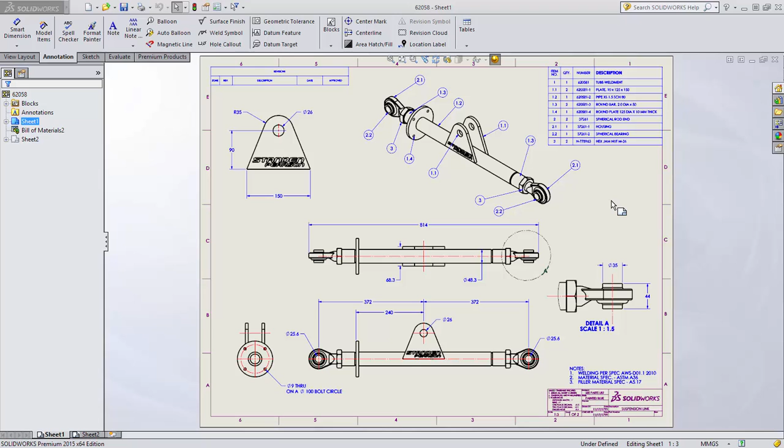Drawings are still important for many SolidWorks customers, and with SolidWorks 2015, we continue to add more functionality to meet their needs. When working with notes and balloons, a new leader type is available, the spline leader, and of course, these are fully editable. These leaders are especially useful for busy drawings or for just pointing to that tough-to-reach part.

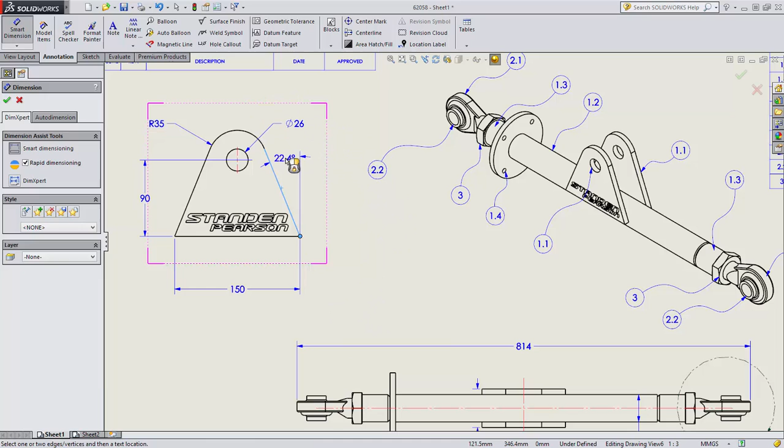When adding an angle dimension, it's no longer necessary to create construction geometry. A manipulator is presented, and you can select one of the legs to aid in the creation of the dimension. And after placement, if you don't like the position of the dimension, there are new options to display the explementary angle or to place the dimension as a vertically opposite angle.

The process of adding revisions has been streamlined. A new button is available directly on the revision table to add a new row. This adds a new row, the revision letter and date, and then takes you directly to place the revision symbol. After placing the symbol, you can see that the revision table now identifies the zone where the symbol is placed.

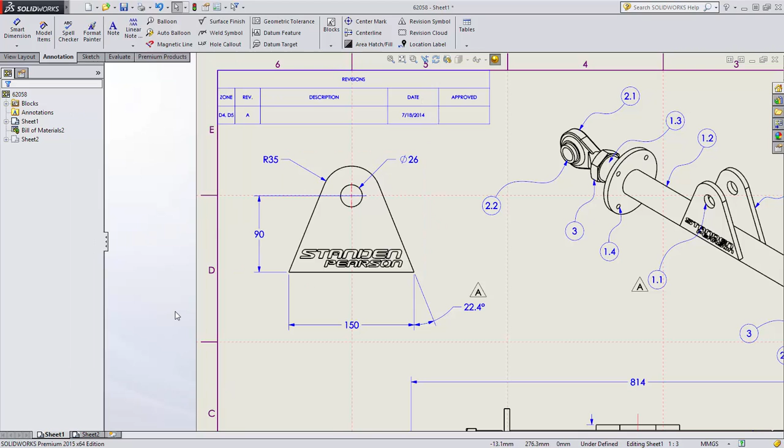If a revision symbol is moved to a different zone, the revision table updates. This zone identifier is derived from the new drawing zones, for example, D5. The zone lines are created in the sheet format and can be viewed on the drawing. Zones can also be used in location labels to provide the sheet and zone for the parent or child view. And if the view is moved, the location label updates.

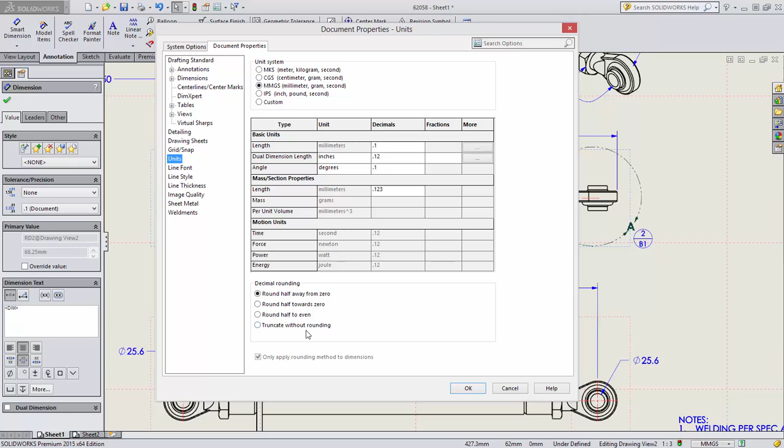Users wanting to have more control over the way that numbers are rounded will be happy with the new decimal rounding options. With SolidWorks 2015, we can now round half away from 0, half towards 0, half to even, or truncate without rounding. Let's set this drawing to round half to even.

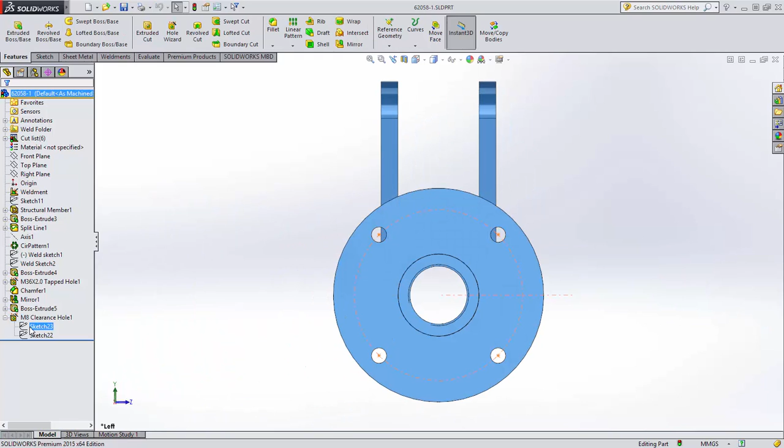That's perfect. This detail view has this nice center mark set, but when changes are made, these center marks can go dangling. Let's take a look. A new option on the context toolbar is to open the model in position. This is a big time saver to get the part oriented exactly as you saw it in the drawing, and it even works when opening a model from an assembly, which is very useful for symmetric parts to know which side is up. Let's delete a point from this Hole Wizard pattern and add two new ones.

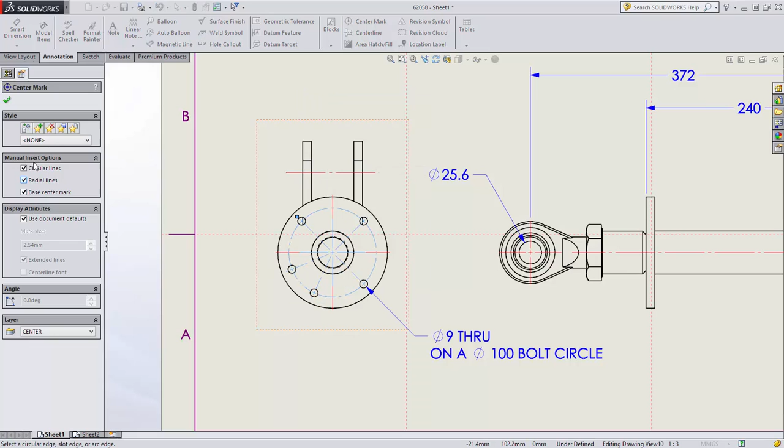When we go back to the drawing, you can see that there is a dangling center mark. This can now easily be reattached to a new hole, and there's a new option to add new center marks to the set. Let's check the option to have radial lines, and you can see that they all behave as one set.

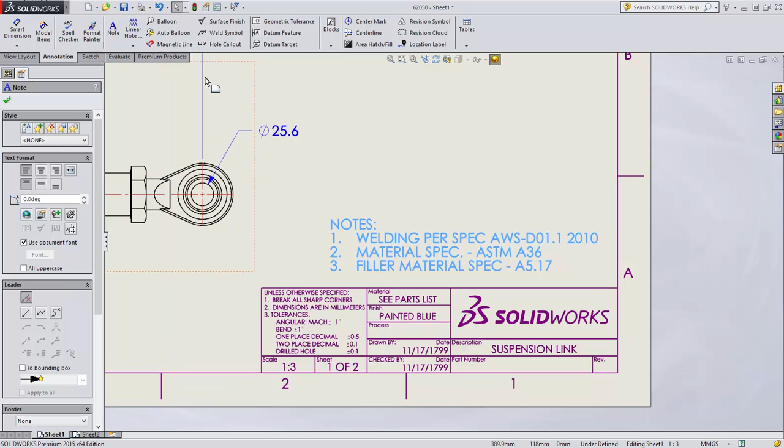Sometimes you may have sensitive information on a drawing that you don't want to get in the wrong hands. Let's place this note on the security layer. And as we access the layer properties, you can see that there's now a new option which controls the printing of each layer. The security layer is set to not print. Now when we look at a print preview of this drawing, you can see that the notes will not be printed and our secrets are safe.

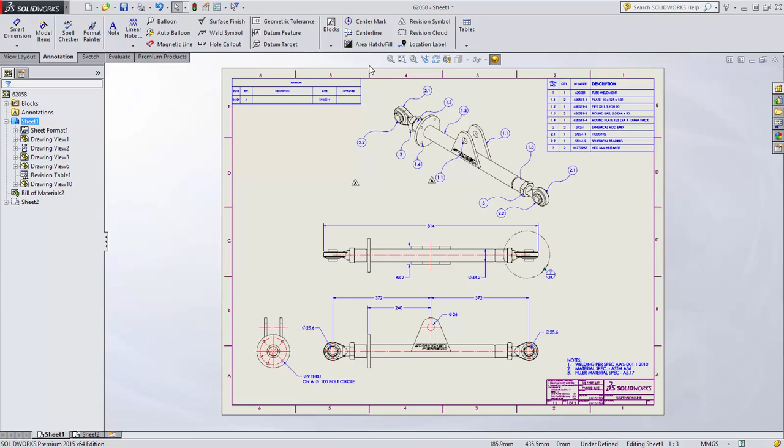Sometimes it's necessary to move views off of the sheet, or view bounding boxes go outside of the drawing border. When you zoom to fit, SolidWorks does just that and includes everything in the zoom. A new command has been added to zoom to sheet, and this allows you to see just the extents of the drawing border. Creating quality production drawings is easier than ever with SolidWorks 2015.